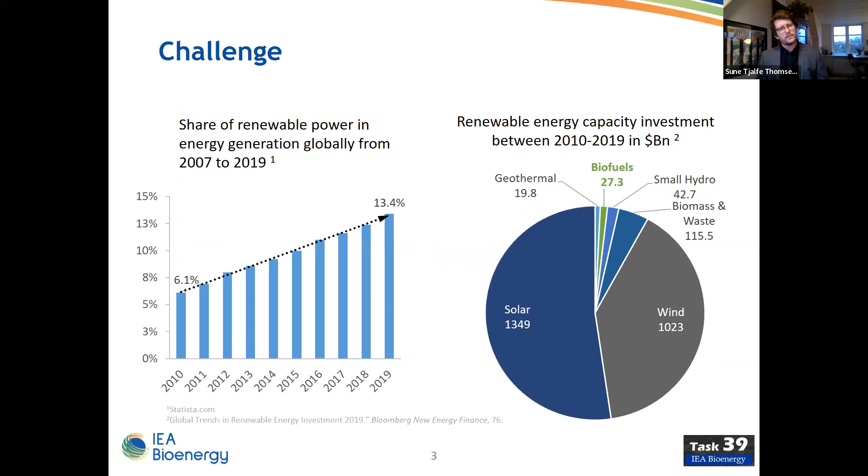The main challenge we see is, even though renewable energy is increasing, the investments in biofuels over the past decades have been quite low, especially when looking at making real capacity. The investments have been lagging a lot behind other renewable sectors such as solar and wind, which is a shame, since especially for the marine sector, biofuels seem to be a perfect fit for many reasons.

One of them being that the fuels and the feedstocks are extremely low in sulfur, so we are addressing that problem very directly. A second being that second-generation lignocellulosic feedstocks are very abundant, so we would be able to cover the need in the sector if we are producing the fuels.

And then there's a third, more specific link between biofuels and the marine sector, which is that the marine engines in the ships are actually very adaptable, in the sense that they can take in fuels that are more problematic than other sectors can handle. Imagine how they are now running on bitumen-like residual fuels. In the same way, the ships would also be able to run on other problematic and therefore also cheaper fuels, thereby not being in direct competition with, for instance, aviation or road transport.

We have also seen quite a lot of different fuels being proposed from different biosources, all the way from biodiesel as we know it in road transport, to more emergent biofuels like syngas from gasification, or upgraded biocrudes from hydrothermal liquefaction, and also alcohol fuels, gaseous fuels, and so forth. So there's a lot of different fuel options, and many of these are actually fitted well with the marine sector.

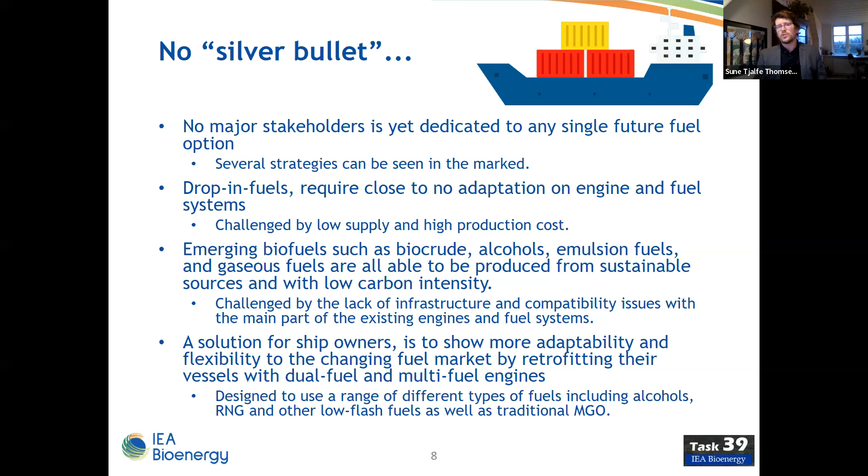So in the recent report, which we started the work with a bit more than a year ago, we had this initial knowledge that the sector would benefit from biofuels, and the other way around, that it was a good match. But we wondered why we didn't see that big market penetration yet, which we might have anticipated just 5 years ago.

So we set out to identify those barriers which would be there, apparently have been there, to keep this large penetration of the market.

So we looked into the background, we analyzed literature and other sources, and we also made a series of stakeholder interviews, talking to major stakeholders within the sector. This report is now available for everybody, so you can download it from the IEA homepage. And similarly, you can also download the previous report from 2017 at the same location.

I will actually let the details stay in the report. And of course, we identified a whole range of barriers, which were all important to certain degrees. But I will jump to the conclusion, where we identified the three, in our opinion, and from the data available, the three most important barriers that we see in the market. And the first of these is uncertainty on sustainability criteria.

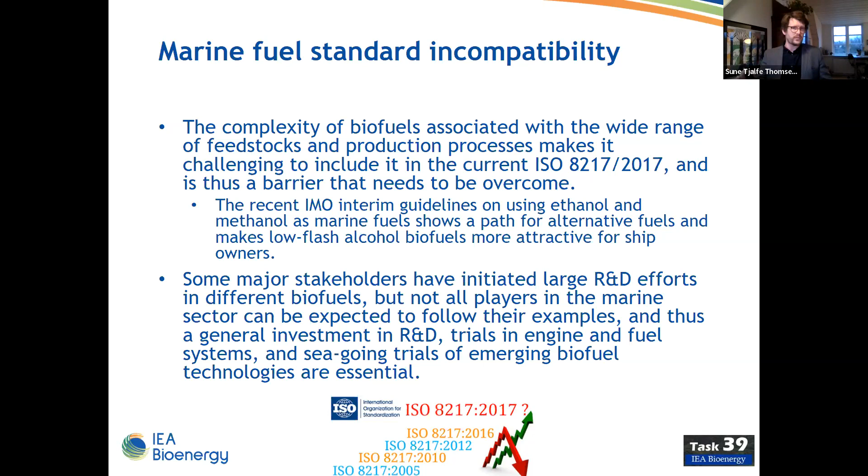The last and maybe also most important barrier is lack of economic incentives at this present time. Right now, the overall cost of using fossil energy is just lower than the overall cost of bio-based alternatives. There are many reasons for that. One being that the biofuel sector would need to build up a new industry. Another being that subsidies for fossil fuels have been a lot higher than subsidies for biofuels. But the point is that it's just cheaper to use fossil energy than bio-based sources.

And therefore there's a need for targeted policies and incentives. It could be in the form of renewable fuel mandates, it could also be subsidies, or it could even be carbon taxation. For that reason, we are looking at the IMO, at the COP negotiations, and other international collaborations, because it's again crucial that these things are targeted on an international level.

And without our interviews being a real, what you could call, quantitative study, we did talk to many different stakeholders, and what we hear is that they are advocating mostly for carbon pricing. It seems that that would be the easiest measure to really have on an international basis.

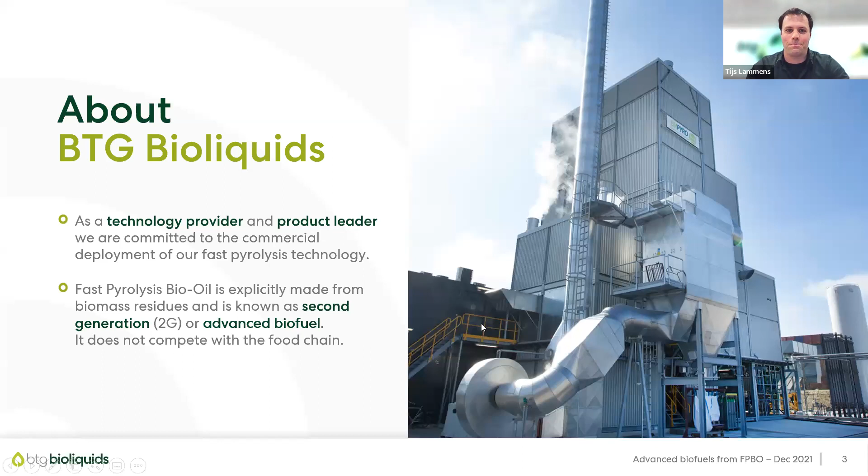A few more words about the current technology deployment. Here you see pictures of the 3 operational commercial fast pyrolysis plants with our technology. The first one was started up in 2015 in the Netherlands, close to our main office in Hengelo. It's called the Empyro plant.

We sold it about 3 years ago to Twence, a waste processing company, because of course we are a technology provider - we don't aspire to run our own production facilities. Then there's the plant for Green Fuel Nordic in Lieksa, Finland, that started up about a year ago. And more recently, Pyrocell in Gävle, Sweden started up last summer of this year.

About fast pyrolysis, very short - I think most people are familiar with the technology, but it's a thermochemical decomposition of biomass. You heat up lignocellulosic biomass really quickly, in a few seconds, to about 450 to 600 degrees in the absence of oxygen, so that you do not combust it, but crack the molecules and turn the biomass into a liquid. This liquid is called fast pyrolysis bio-oil.

Byproducts of the process are heat, and you can turn that heat, of course, also into power if you want to.

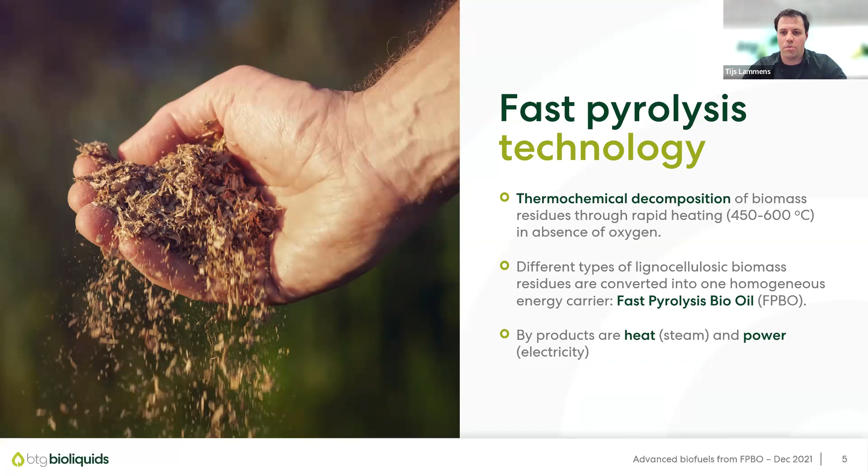Vapors are separated from the sand and the char that is produced just by gravity. They go up through a separator and cyclones to further clean the vapors, to a condenser where the bio-oil is formed, which finally goes to a storage vessel.

If you follow the solids in the process, the sand and the char that is formed, it goes down and then through a riser with air into a combustor. Because of the air present and still hot temperatures, all the char is combusted, and that delivers the heat, the energy required to keep this process running.

It's completely self-sufficient. There's an excess of heat produced in a steam boiler that is turned into steam, and the steam can further be used either to create power that can be supplied to the grid and to operate the plant. Besides that, you can also use the steam to dry your biomass, dry the sawdust for example, before it goes into the process, and even export it to an external customer.

Now about one specific project, the most recent one, Pyrocell, the pyrolysis plant now running at capacity. It started up in September of this year. Pyrocell is a joint venture of Setra, a wood processing company, and Preem, a Swedish oil refiner. It produces pyrolysis oil from sawdust, as I mentioned, started up this year.

It was delivered turnkey EPC by Technip Energies - they did all the construction. Pyrolysis oil production of this plant is 24,000 tons per year. All this pyrolysis oil will go to the refinery of Preem in Lysekil, where it will be co-processed to produce advanced biofuels.

Delivering a greenhouse gas reduction of about 80 to 90%. And of course, these fuels are in compliance with EU legislation and also with the relevant Swedish legislation for advanced biofuels.

Then I want to switch, use this as a bridge to go further about producing advanced biofuels from fast pyrolysis bio-oil through refinery processing.

Let me start with the supply chain. The way we look at the supply chain from biomass to advanced biofuels is that you should convert the biomass into a liquid as decentralized as possible, so close to where the biomass is, so that you do not have to transport the biomass itself.

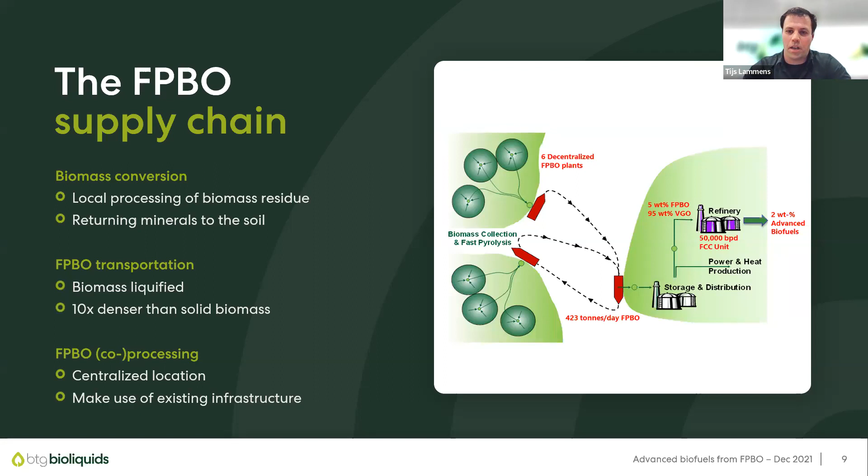Then once you have produced the pyrolysis oil, you can transport it much more easily. It's liquid, it's ten times denser than solid biomass, so it makes life easier to transport. And finally, you can process it in a centralized location, such as an oil refinery, making use of existing infrastructure.

So the fast pyrolysis bio-oil, the crude bio-oil as we produce it, can be co-fed in a fluid catalytic cracker, for example, in an oil refinery. You can feed it directly, but you can also first do an upgrading step, such as a hydrotreatment step, to stabilize the oil and partly deoxygenate it. This way you can either co-process larger volumes in your refinery, or use different units, potentially hydrotreaters, instead of just fluid catalytic crackers.

What you can also do is completely deoxygenate the pyrolysis oil to a product referred to as mixed transportation fuel, which is essentially a barrel of completely bio-based crude oil that you just need to distill to make fungible fuels.

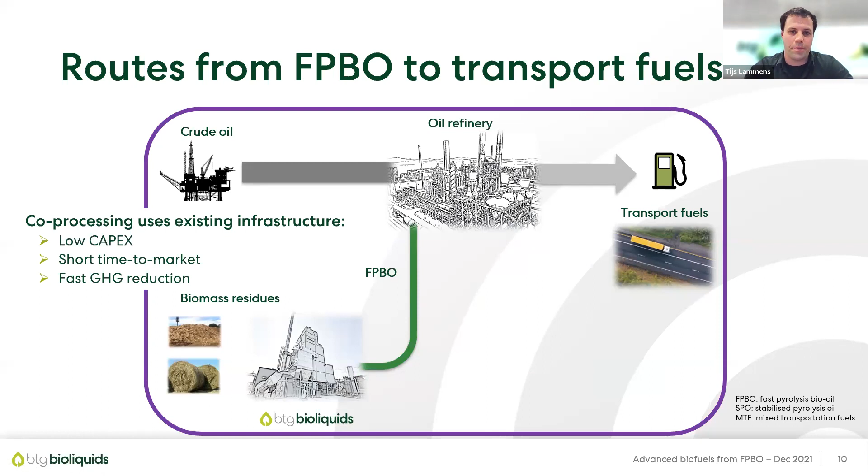Of course, that brings a challenge when it comes to certification and legislation: how to track the green content if it goes into all these different products.

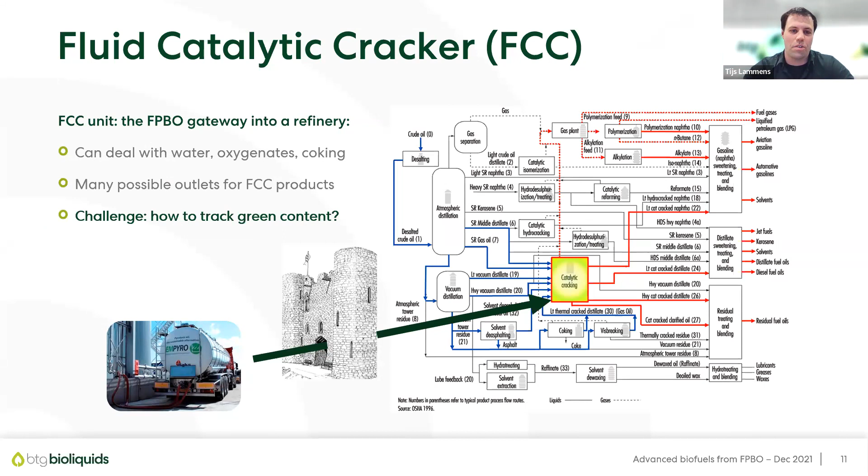What you do when you co-process fast pyrolysis oil is co-inject it, using a separate injection system to inject the pyrolysis oil into your unit. Then as soon as it comes into contact with the catalyst, your biomolecules are cracked and everything is mixed together.

And that means that your biomolecules are cracked together with your regular feed, and they end up in all the different products that you make in your FCC unit.

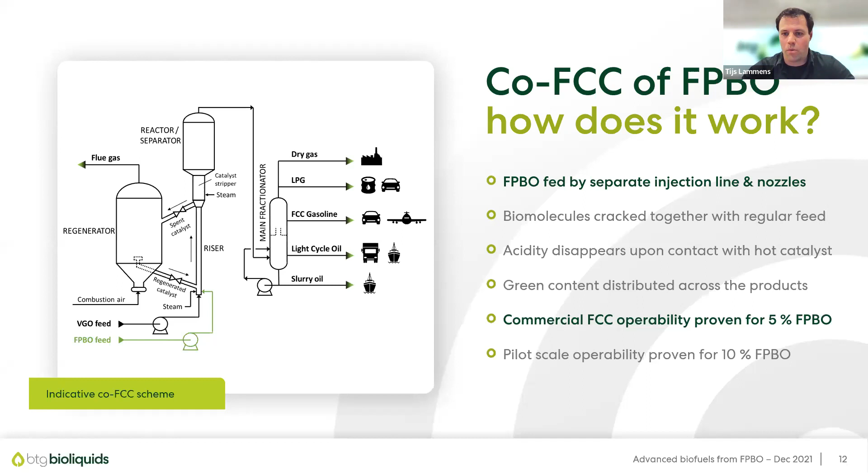Commercial operability of these units is proven. There have been several refinery trials with FCCs around the world, typically 1 week operation, co-processing with fast pyrolysis oil, and that showed there's no operational issues. Also at pilot scale, it has been shown that you can go up to around 10% co-processing of fast pyrolysis oil.

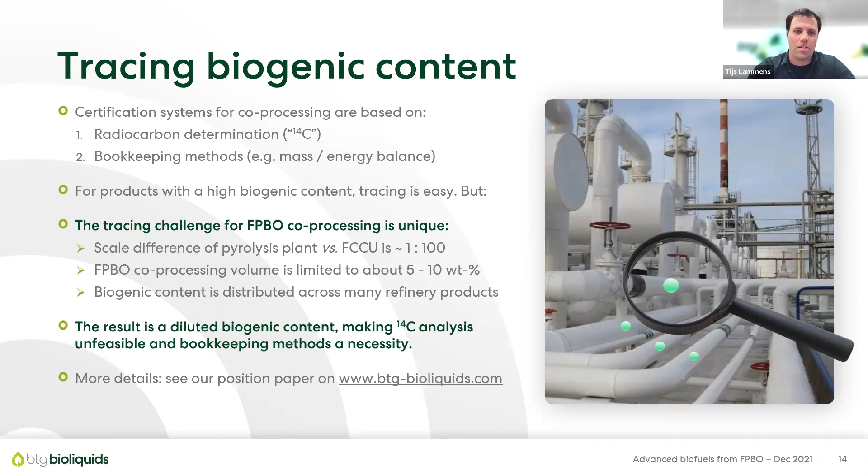It uses sawdust. We did economic allocation of the impact of the wood processing and the whole supply chain beforehand, of the emission impact to the sawdust. So it's a bit more stringent than what the current Renewable Energy Directive legislation says, which is that you can just start with 0 emissions if you use a waste product like sawdust. But we allocated it economically, and then produced the fast pyrolysis oil to be shipped to a fictional refinery somewhere in Western Europe, think the Netherlands, Belgium, France, the UK, and then 5% co-processing in an FCC using the public data as published by Petrobras.

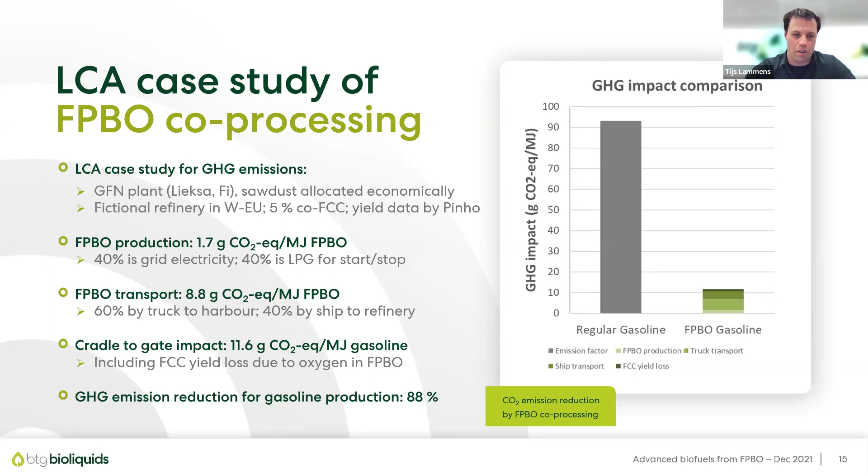But despite that, we still saw an overall impact that's relatively modest. We saw a greenhouse gas emission reduction for gasoline production through this example of almost 90%, which is quite good, I would say. And if you would convert the pyrolysis oil closer to where it's produced, this could still dramatically reduce the emissions further.

In summary, I hope I was able to show with this presentation, first of all, that fast pyrolysis bio-oil production has reached commercial maturity. There are currently 3 operational plants with our technology.

Furthermore, advanced biofuels from pyrolysis oil co-processing has a high potential. It's low in capex, it's short time to market, and with that you can achieve fast greenhouse gas emission reductions. So you can start tomorrow if you want.

And then I've hopefully shown the feasibility of it. The co-processing in an FCC unit is proven up to 5 weight percent. Operability has already been demonstrated at commercial scale, in actual refineries. FCC products show a favorable gasoline yield, so that's a bonus. And of course, the exact yields will depend on the specific unit, the feedstock it uses, and the process conditions.

Tracing biogenic carbon in this process is a challenge. It will require a bookkeeping method. And I hope I showed you with the LCA case study example that there's a very high potential for greenhouse gas reduction through this pathway. That's it. Thank you very much for the attention.

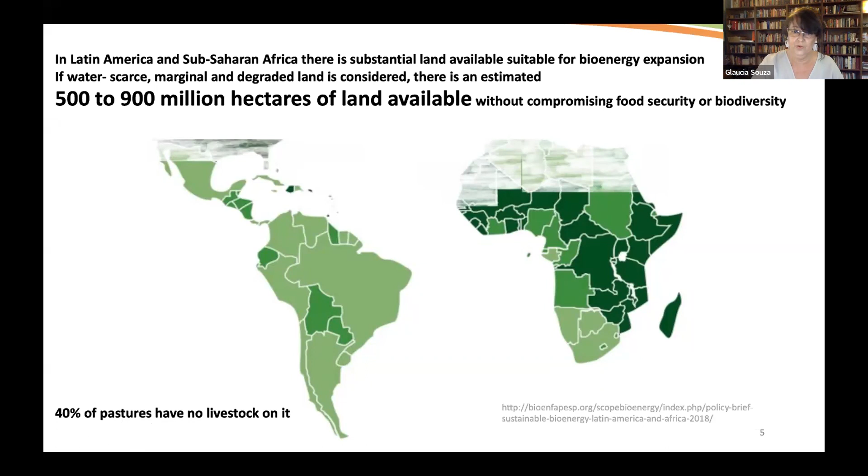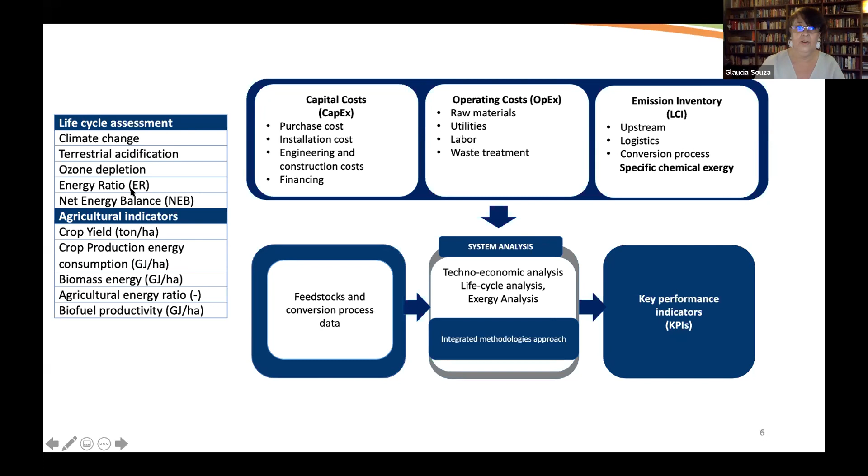40% does not have any livestock, so we could improve efficiency of pasture use in these regions. So we started a work that intends to integrate TEA, life cycle analysis, and exergy analysis to define key performance indicators that could show us where we could improve sustainability in the process. We looked, at this point, at feedstocks and conversion data. We have agricultural indicators analyzed and done an initial life cycle assessment in 4 countries. So we started with Argentina, Brazil, Colombia, and Guatemala. These are their national biofuels programs as they stand.

Argentina has a new policy since July this year. They are currently adopting E12 and B5. It's fully implemented, and Argentina exports biodiesel to US, Europe, and Latin America.

Brazil started the RenovaBio program in 2020. This year, it aims to save 24 million tons of CO2 emissions. We currently have, interestingly, pure ethanol in all gas stations in Brazil. We don't have pure gasoline, we have E27, so 27% of ethanol mixed into all gasoline, and also B10, and a large flex fuel engine fleet.

Colombia started their law in 2001. It was implemented in 2002. They are currently using E10 and B12.

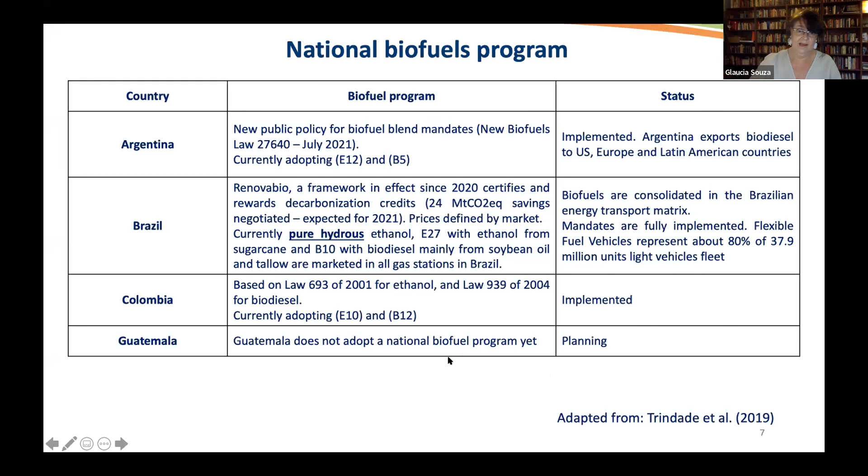Guatemala has not adopted the national biofuel program yet, but it's planning to.

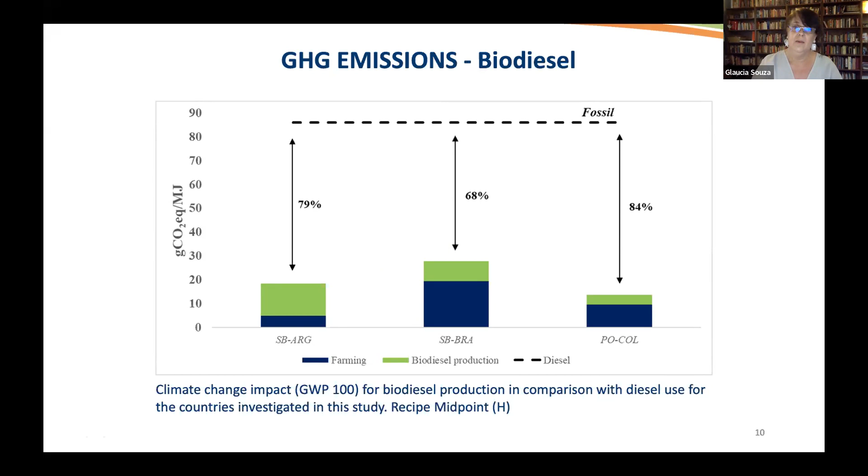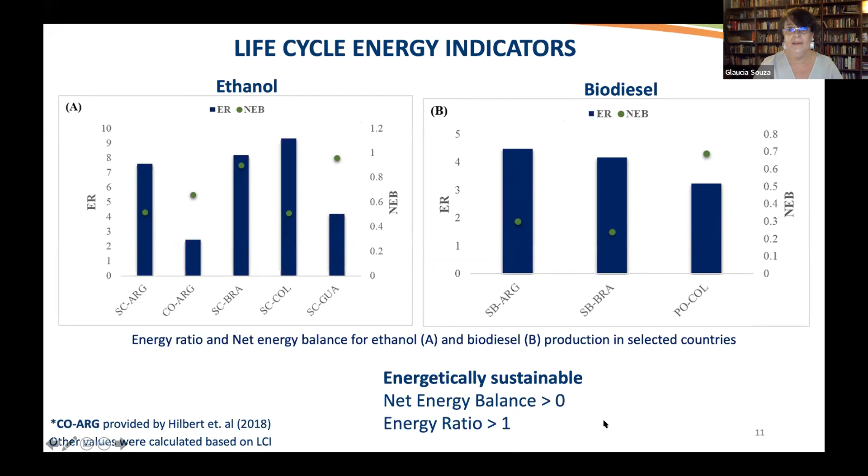We also evaluated emissions with biodiesel. The main point is that there's always a large reduction of emissions by using these fuels. We calculated the energy indicators, net energy balance and energy ratio, all of them being more than 0 and 1 here. This means they are all energetically sustainable.

Then we looked at what impact we could expect if we had a policy that would reward low carbon fuels, so we used the example of RenovaBio. RenovaBio is a market-driven incentive for pricing externalities. It transforms social and environmental costs of using fossil fuels into revenues for those that can be certified to reduce emissions. It uses a life cycle analysis.

It disqualifies biofuels that are produced associated with deforestation. All this is done without additional taxes or subsidies, without setting volumetric targets, and without establishing a captive market. This is the policy framework of RenovaBio.

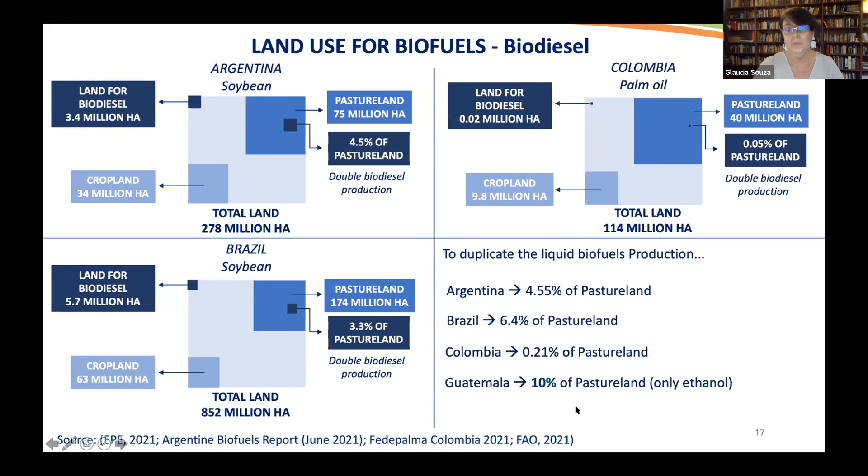We did this for ethanol and for biodiesel. In summary, we would need 4.5% of pasture land conversion to crops in Argentina, around 6% in Brazil, 0.2% in Colombia, and around 10% in Guatemala. This was the largest percentage needed to double the production of biofuels.

We previously did a similar study, published last year, where we made calculations for 20 countries in Latin America and Africa, considering the current yields we have in Brazil. I think the present study I just showed is an improvement because we are considering local conditions. But in that earlier study, we also calculated that with 1% of pasture used for biofuels, we could get to around 50 million tons of avoided emissions.

For Task 45, we did a study, a review on the payback time - how long it takes - and the best practices for land use. There's a lot of lessons learned already for these biofuels, with lots of new technologies in use. What we see is that if you convert cropland to sugarcane, the payback time is 0.

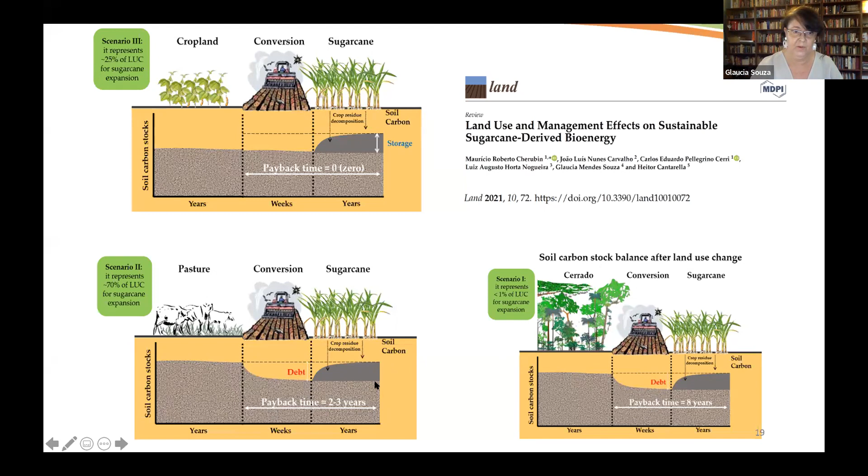If you convert pastures into sugarcane, there is an initial debt, and you need around 2 to 3 years for the soil to go back to initial carbon levels. You don't want to convert cerrados to sugarcane - that has 8 years of payback time, so it's not worth it. But this pasture conversion to sugarcane is a very good route.

In conclusion, we see that the biofuels produced in these countries are energetically sustainable and lead to significant reductions of emissions as is. To expand, we would need around 5% of pasture lands to be able to duplicate production. This could bring revenues, and we could innovate in these regions. We need significant improvement in farming activities and stop using natural gas, going totally renewable. So lots of opportunities for R&D here.

I want to focus on these last two points regarding yields. I mentioned the large impact that higher yields in Colombia have on the agricultural ratio. We have some good news here - research efforts are rapidly stepping up. We have sequenced the sugarcane genome, and we have a lot of biotechnological answers to some of these challenges, including the production of bioproducts.

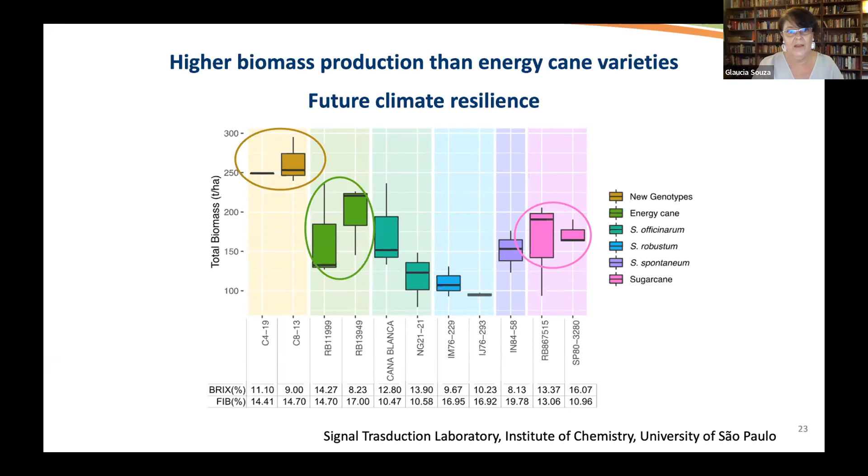The next step is to look at the economic indicators, current and future, of what we expect to have coming. We also want to analyze exergetic indicators - I like this renewability index that will show how, with the use of all these residues, we could improve and expect great gains here. We want to expand to other countries as well, so we are at the point of integrating these three different analyses.

I want to finish by thanking my colleagues who participated in this project, especially Nicolas Canabarro and Pablo Ortiz, who are doing the heavy lifting of the project.

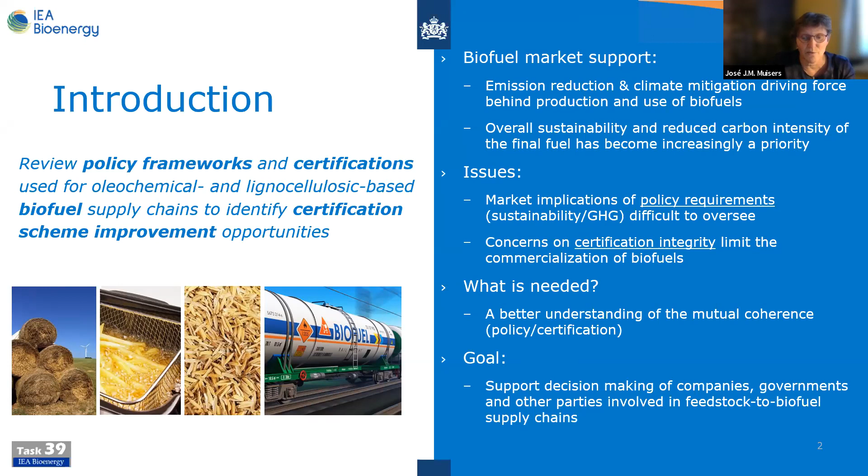Why this study? As already mentioned in this session before, emission reduction and climate mitigation are the driving force behind the production and use of biofuels. Because of that, the importance of overall sustainability and reduced carbon intensity has become more and more a priority. However, market implications of policy requirements related to these sustainability and greenhouse gas emissions are often difficult to oversee. Besides that, concerns on certification integrity might limit biofuel sales. So what we want to address with this study is to provide a better understanding of the coherence between policy requirements and sustainability certification. In this way, we intend to support decision-making of parties involved in biofuel supply chains. The overall focus of this project is on non-conventional advanced biofuel supply chains. And it appears already that the definition of advanced is an interesting item to analyze for trade policies, because it can refer both to the bio feedstock used as well as to low carbon intensity of the fuels.

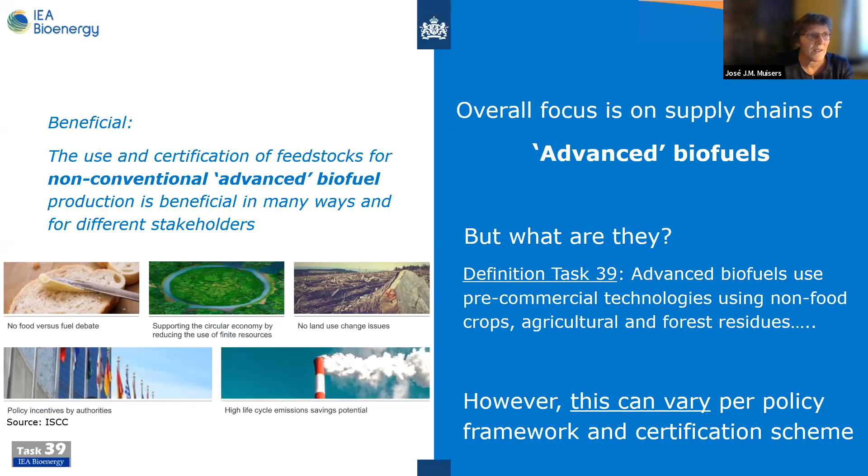As mentioned, phase 1 is on reviewing policy frameworks and to get a better understanding on the level of alignment of differences between policies. The analysis will focus on issues like sustainability requirements, monitoring compliance, chain of custody management, and traceability and transfer of data within the supply chains. I will go into these topics in more detail in a moment. Several national policy frameworks of the Task 39 members are included in the analysis, and with respect to the US, the focus will be on California low carbon fuel standards. For Europe, besides the overarching EU policy on biofuels, the Renewable Energy Directive, some of the national implementations of this policy in some member states has also been taken into account. In addition to input from Task 39 members, we are glad that we received also information on the ICAO CORSIA policy framework on aviation biofuels. The ICAO CORSIA policy currently covers over 100 states.

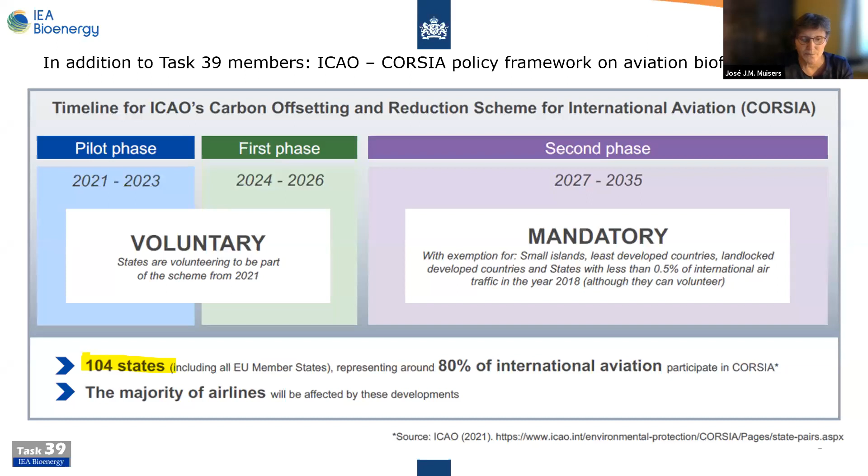The proof of compliance, I want to start with that. Proof of compliance to meet sustainability requirements. Several ways can be used here, several options are available. It can be obtained by using verification, without certification, solely by assessment and validation based on data. Furthermore, by certification through independent private systems, and also by a combination of these two.

What we observed so far is that in case of verification, data quality is key, so something about the quality of the data has to also be in the policy requirements if only verification is used. When using certification schemes, a clear policy framework with detailed minimum requirements is required for alignment reasons, because the certification schemes have to come up with the same results at the end.

Furthermore, certification systems appear to be flexible to some extent and adapt to specific policy frameworks through the development of modules. An example for this, for aviation: ISCC certification of sustainable aviation fuels has several certificates, each with its own set of sustainability requirements, verification requirements, and acceptance of certification schemes. It's all about aviation biofuels, but using different modules of the ISCC scheme.

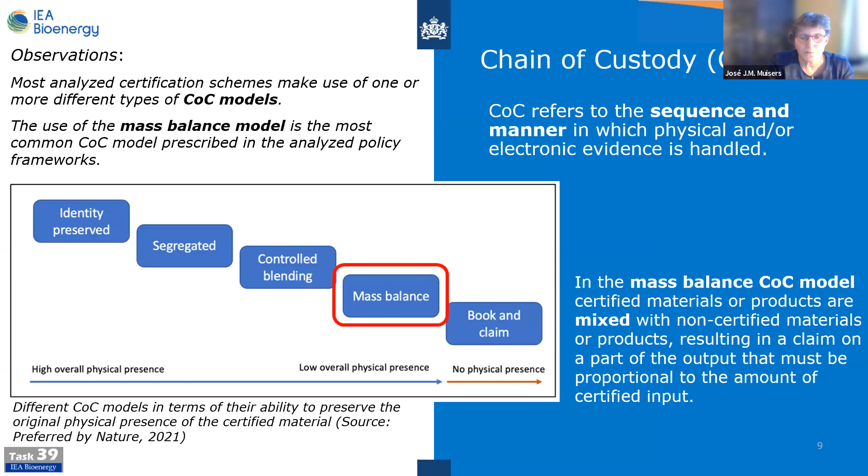This places higher demands on the paper trail and checks that accompany the fuel, because of the lower physical presence of the biofuel in it. In other words, it sets higher demands on the management of the chain of custody to ensure that biofuels actually find a way to the market.

However, observations here were that despite those higher demands, the extent to which mass balance requirements are actually integrated in the analyzed policy frameworks is not the same. This is the case, for instance, for allocation rules: the requirements for allocation rules differ in policy frameworks. And this unclear COC management could lead to risks, as shown in this study, for example incorrect mass balance and allocation. The severity of these risks depends on the biofuel supply chain.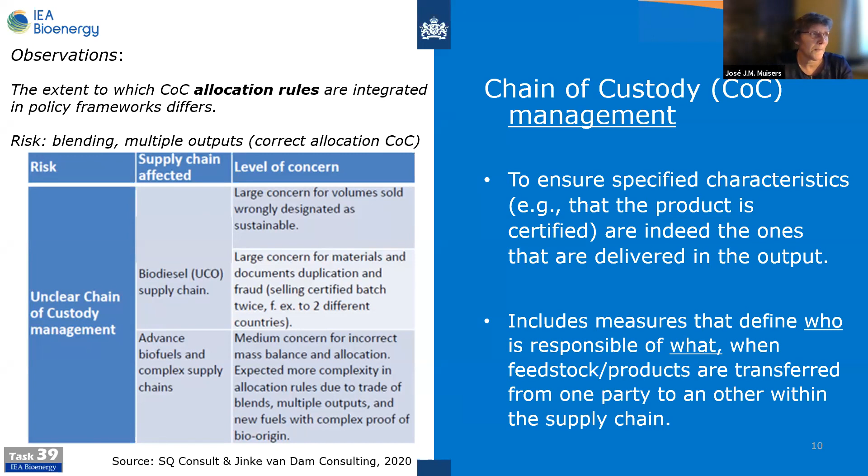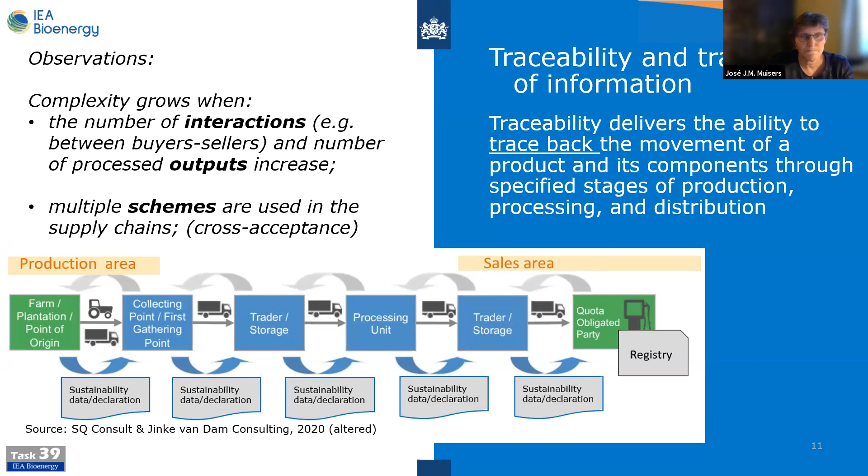Also, with respect to traceability and transfer of information, the first link in the supply chain, or the point of origin, is important. Requirements about the first link that is subject to verification or certification are often related to the feedstock used to produce the fuel. Information on the origin of the feedstock is key for its classification, whether it's a waste, a residue, or a co-product. However, we have observed different non-harmonized interpretations regarding feedstocks, and as a consequence, the first link in the supply chain may differ depending on how the feedstock is categorized.

For example, if a feedstock is categorized as a waste, only downstream greenhouse gas emissions have to be accounted for from the point the waste occurs. Whereas if the same feedstock is categorized as a co-product, all the upstream and downstream greenhouse gas emissions have to be included.

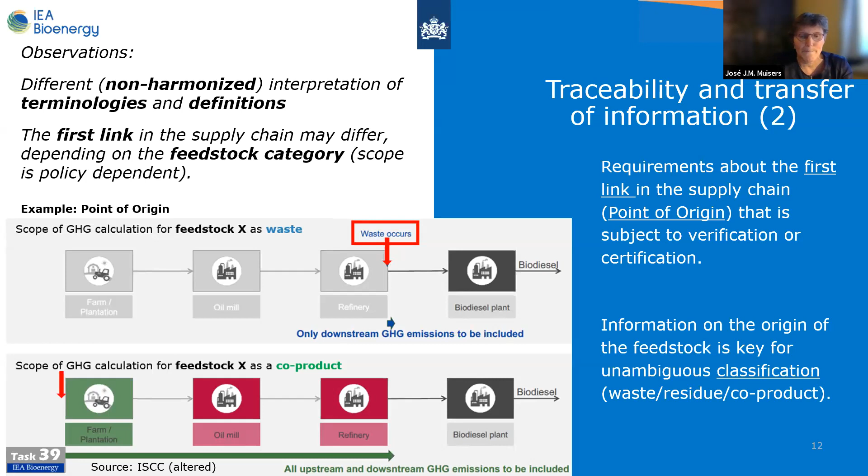Information requirements at the end of the supply chain refer to both the data to be submitted and the authorization of the competent regulating authority that checks the data at the end. The information to be submitted to the competent authority for checking compliance differs due to different policy requirements. We noticed that greenhouse gas requirements are generally covered, but there's more diversification for other land-based criteria, for example biodiversity, whereas in the case of social criteria, there appears to be a main gap.

The role of certification schemes on a global scale is limited; their role is mainly in those regions and countries where they are recognized. It was also observed that outsourcing public responsibility for monitoring to private certification schemes might be at the expense of public supervision, as authorization for monitoring might be limited to the last link in the chain, whereas the sustainability declaration or certificate covers the rest of the chain.

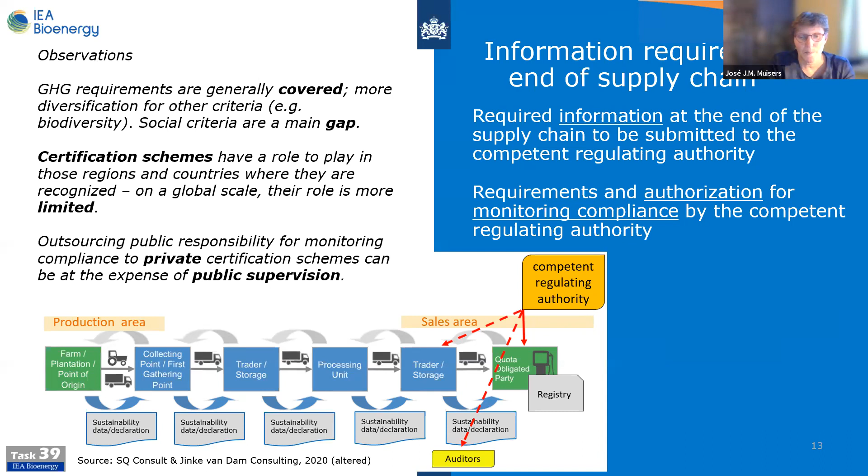Finally, a small quick glimpse into phase 2 of the project for the next triennium. The focus of phase 2 will be on risk and potential risk mitigation in the selected supply chains. Risks in this context refer to effectiveness and reliability of compliance. As already mentioned, risks can arise in different parts of the supply chain, at the point of origin or collection point, during trade and transport, during production and blending, and even more locations.

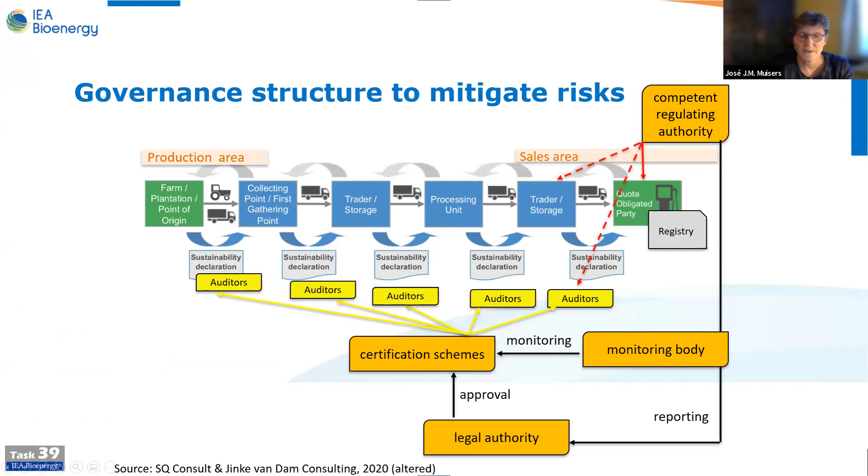With respect to potential risk mitigation, in phase 2 policy-based certification schemes will be analyzed to identify scheme improvement opportunities. Besides insight into certification scheme improvement options, the additional goal of this project is to come to a better understanding of the coherence of legal requirements and certifications and its impact on biofuel feedstock supply chains, so trade flows. A better understanding of this overall might support the decision-making of the different parties involved in the biofuel market.

This is my last slide. Thank you for your attention. Back to you, Jim. I'm glad to take any questions.

Yeah, thank you very much. I'm not seeing a lot of questions in the chat, so I will just, in the interest of time, ask one: what do you see, or do you see any developments on the international harmonization, the global harmonization? Because that seems like a very important issue, especially for sectors that biofuels are now being targeted for, aviation, marine, which are very, very international in character. It seems like a coordinated certification approach is needed, yet it seems to be very geographically specific at the moment.

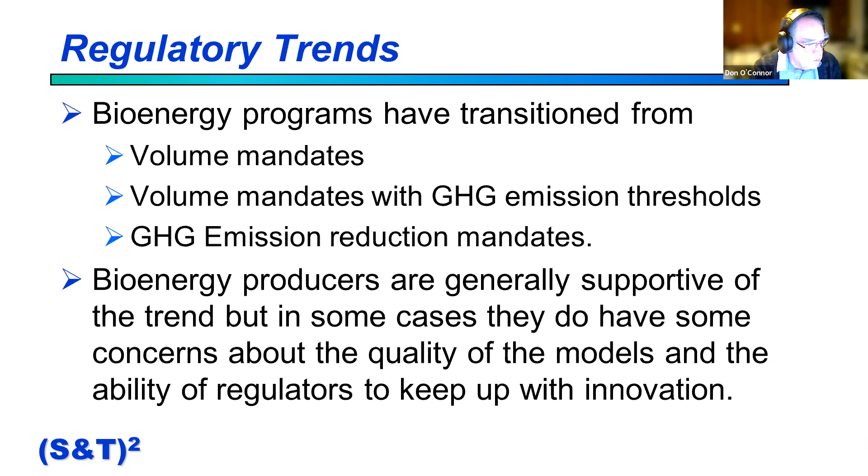I would say that bioenergy producers are generally supportive of the trend, but in some cases they do have some concerns about the quality of the LCA models and the ability of regulators to keep up with innovation.

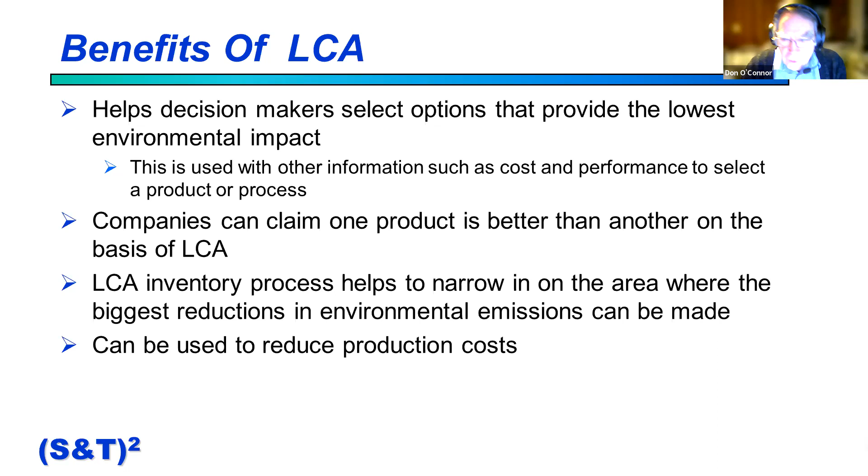So what are the benefits of doing life cycle analysis? Originally it was to help decision makers select options that provided the lowest environmental impact. LCA was used when we had just volume mandates. Companies can claim that one product is better than another on the basis of an LCA. From a company perspective, LCA processes help narrow in on areas where the biggest reductions in environmental impacts can be made, and so they can actually be used to reduce production costs. So they have benefits other than just from a regulatory perspective.

The limitations of an LCA: LCA tools were not originally designed as compliance tools. Doing an LCA can be time and resource intensive, and the availability and accuracy of the data that's available can influence the results. Most LCAs don't determine which product works best or is the most cost effective, and really LCAs are used as one component of the decision-making process, looking at the trade-offs between cost and performance.

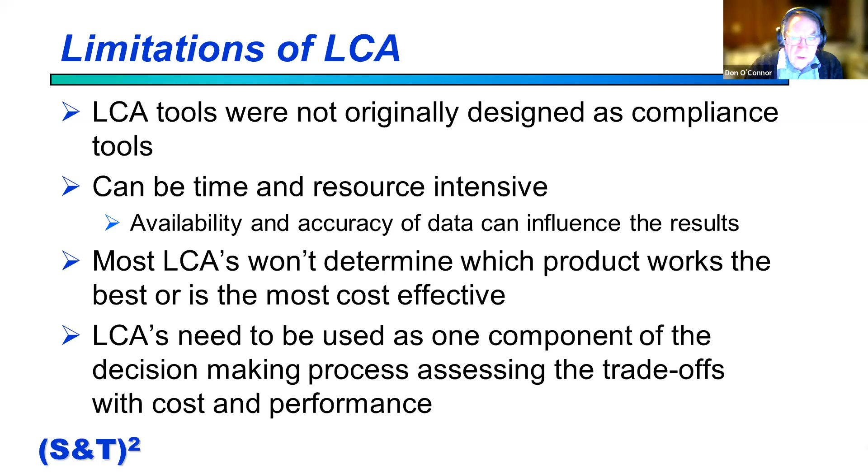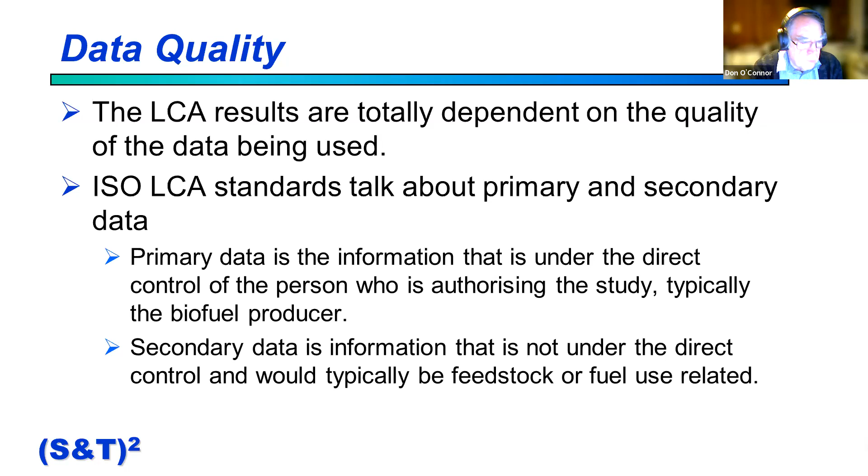Secondary data is information that is not under the direct control, and in our case would typically be feedstock production related emissions, or perhaps fuel use emissions. Secondary data in LCA work is usually aggregated data from government studies or other studies or surveys that might have been done.

Some of the challenges with all of this secondary data is that it can be old. There's lots of data and models that are 10, 15, 20 years old. It can be taken from different regions that use different technologies, so it might not be applicable to what's happening in your particular area. In some cases, it is just an expert estimate, so somebody has made a guess at what's happening within that process, or it could be based on a very small data set. If you start looking into LCA or lifecycle inventory databases, you can quickly find examples of all of these particular cases that call into question some of the LCA work.

But quite a long time ago, 20 years ago, the community came up with a way to rank the data quantitatively. The data is typically ranked with 5 categories: reliability, completeness, temporal, geographical, and technological. And it's rated on a basis of 1 to 5. A really high quality data set will have 1,1,1,1,1, and a low quality data set is 5,5,5,5,5. In fact, most data sets are somewhere in between the 1s and the 5s, so you get a mixture here.

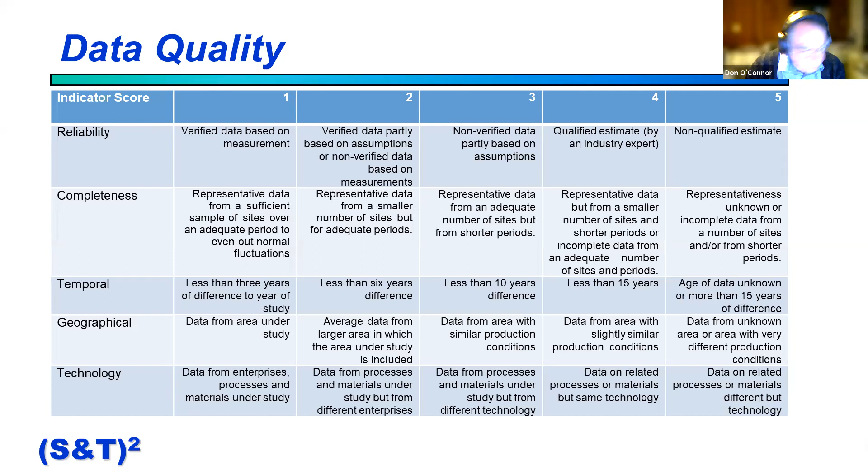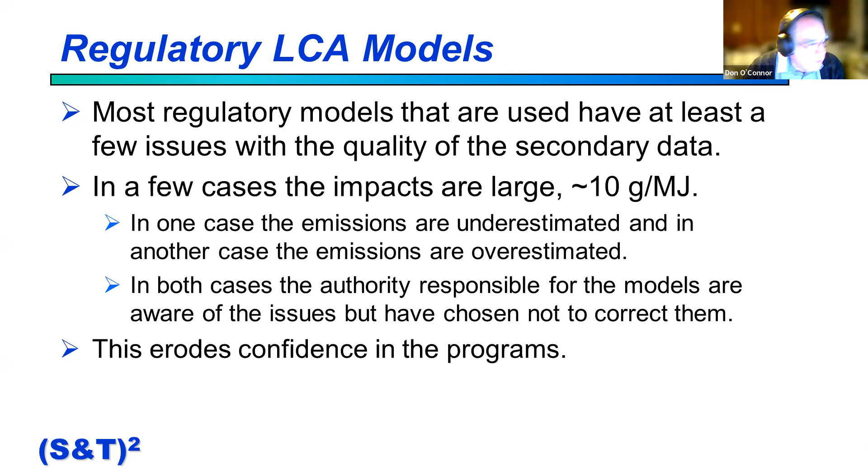So we need to be working on addressing the quality of the data in all of these models. In the past couple of years, the IEA Bioenergy Task 39 had collected data from RenovaBio files that were made available for public comment. In the RenovaBio process, there was third-party verification of the calculated carbon intensity, and as part of that process, they had to make their data and findings available to the public. During that public comment period, it was possible to download the data that went into the calculation of the carbon intensity of ethanol in Brazil.

So we collected data on 69 mills in Brazil, and there's a draft report that's been prepared, and we're going to be publishing that through Task 39.

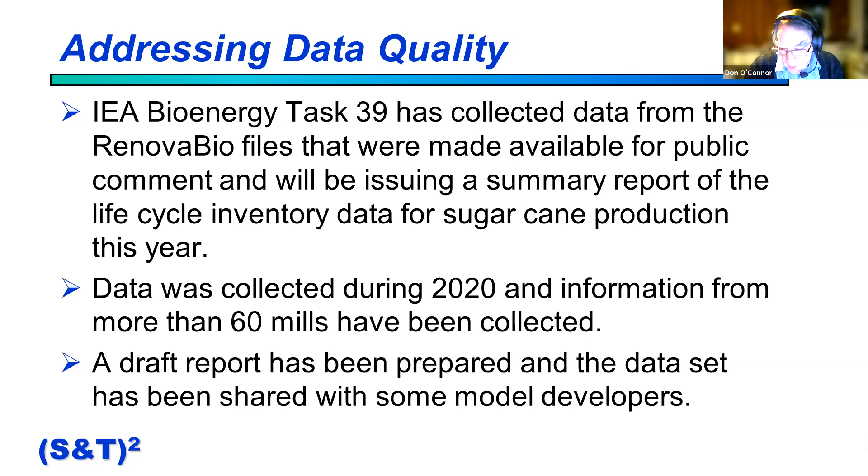The data set has also been shared with a couple of model developers, and at least one of them is preparing to update their LCA model based on the information collected from the mills. I believe this is a very high quality data set. It will be transparent, and it will set a standard for others wanting to do the same kind of activity.

But we need a continual effort to update these secondary data sets if we want credible life cycle analysis. There are lots of examples where the data is quite old in all of the models used for biofuel LCAs, and even in cases where we have new LCA tools being published and used for policy development, some of the data is quite old.

Last year, the European Commission had a new model developed for transportation fuels, and it had a lot of good aspects to it. But for the biofuels part of it, the data was almost all at least 20 years old and really not representative of what's happening today.

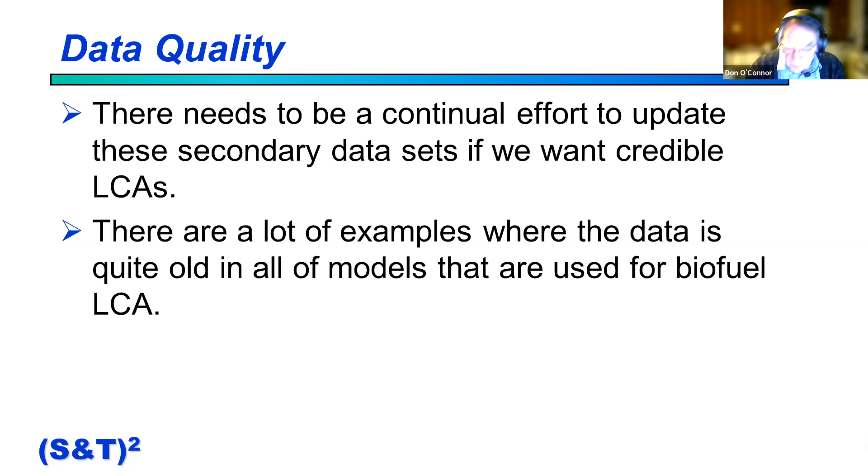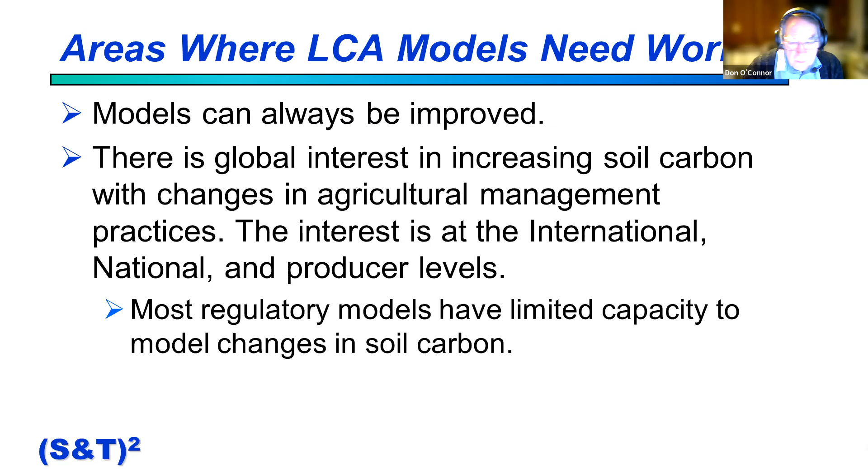Data quality is not great. Making actual measurements is very difficult because of the small changes that we get on an annual basis, but it is an important area where LCA models need a lot of work.

There's also issues around electricity production. We have a lot of interest in net zero and zero emissions, and we're really ignoring the fact that getting to zero is really hard to achieve. Some of the options that people think are zero emissions aren't really zero emissions.

Hydroelectricity is often considered to be a zero emission source, but we have the issue of emissions from flooded lands. In fact, just in 2019, when the IPCC released the refinement of guidelines for the calculation of national inventories, they added a new category. Previously, you had to account for land clearing emissions for the first 20 years, but we now know that there is new biomass added to reservoirs every year that results in methane emissions.

Now governments are supposed to be calculating emissions from flooded lands that remain flooded lands. And I would also say that the emissions from the maintenance and operation of electric power systems are generally ignored. I have looked, and it's really hard to get good data, but the limited amount of available information indicates that these emissions - the maintenance of transmission lines and the operation of the systems to keep them working - are not as low as people think, and need to be incorporated. Of course, both of these make getting to zero much more difficult.

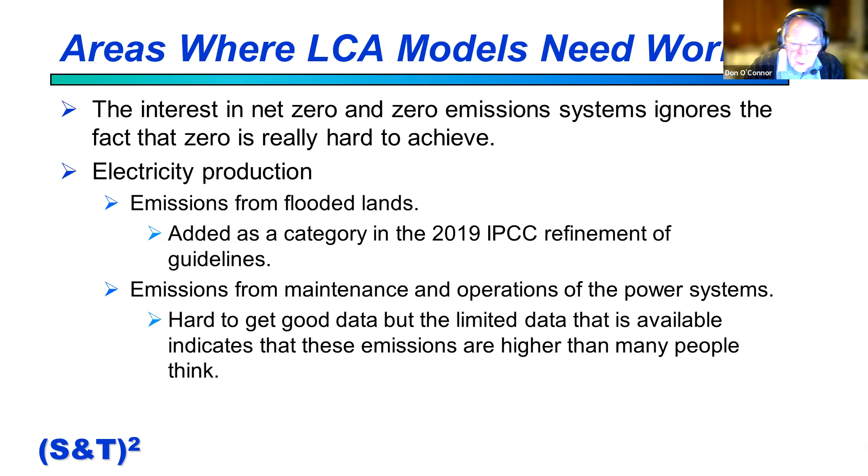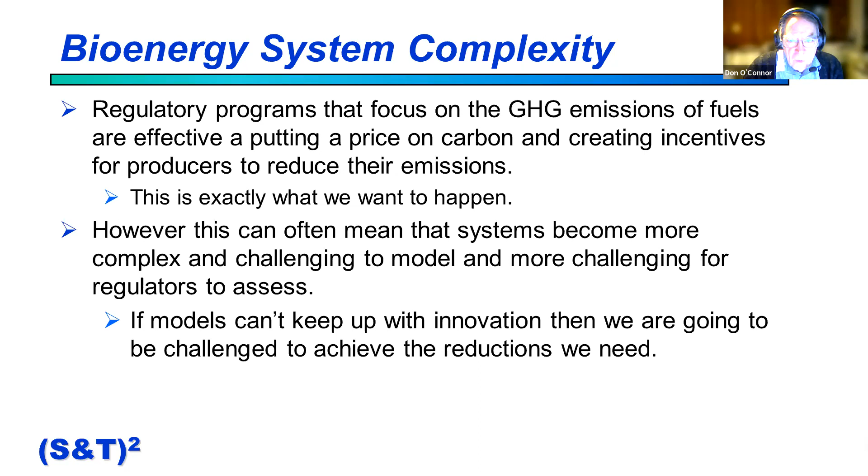If the models can't keep up with innovation, we're going to be challenged to achieve the reductions that we need. Regulators can't just put a model out there and expect it to be static and still give them good results 5 years from now or 10 years from now.

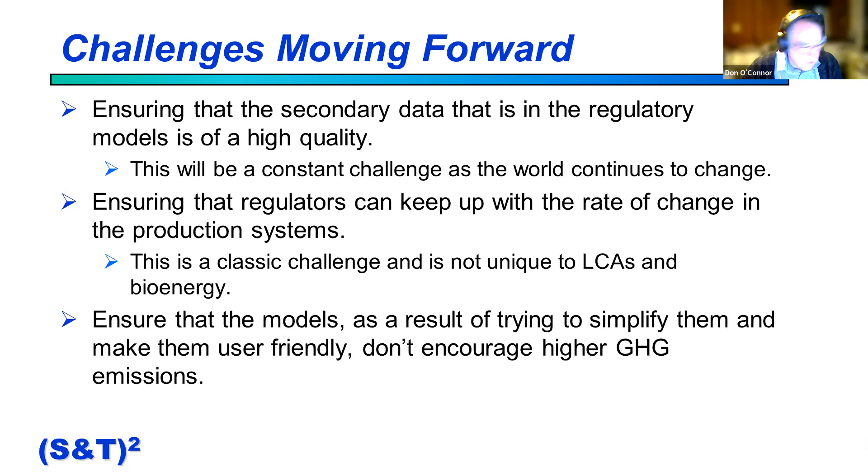And ensure that the models, as a result of trying to simplify them and make them user-friendly, don't encourage higher GHG emissions. I know of one case where they've simplified the models to the point where it gives a better score if you actually have higher emissions, because of how they've developed some of the secondary data.